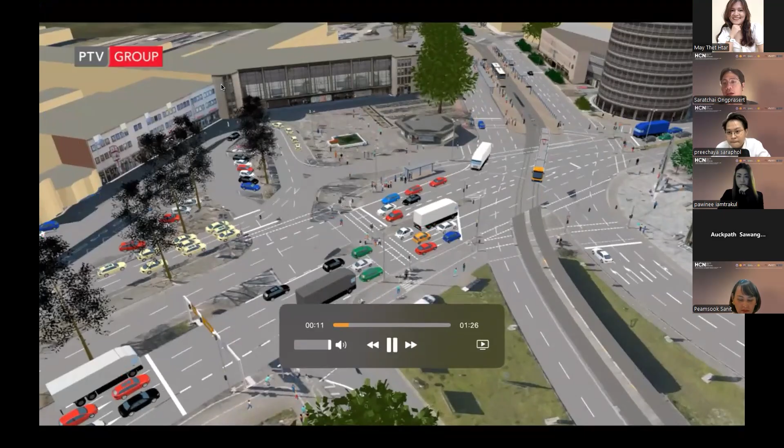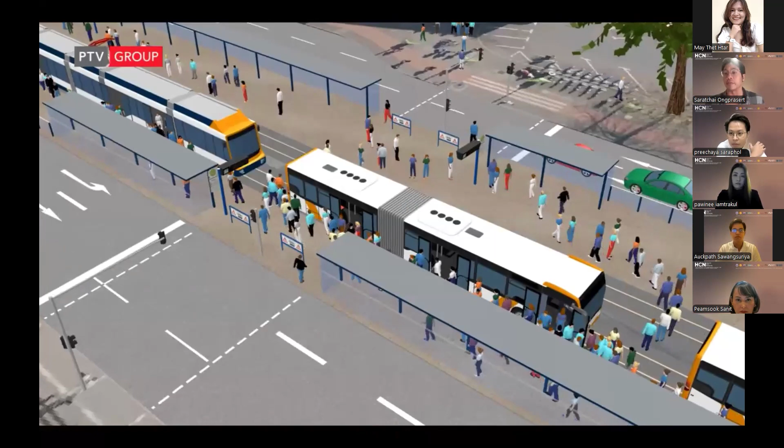I like to talk about simulation. I think everyone has very insightful views about the safety of vulnerable people like pedestrians, including bicycles and bikes. Sometimes, if something has not happened yet, you need tools for simulation and visualization to foresee what could happen if you implement something. Today I will show a number of examples.

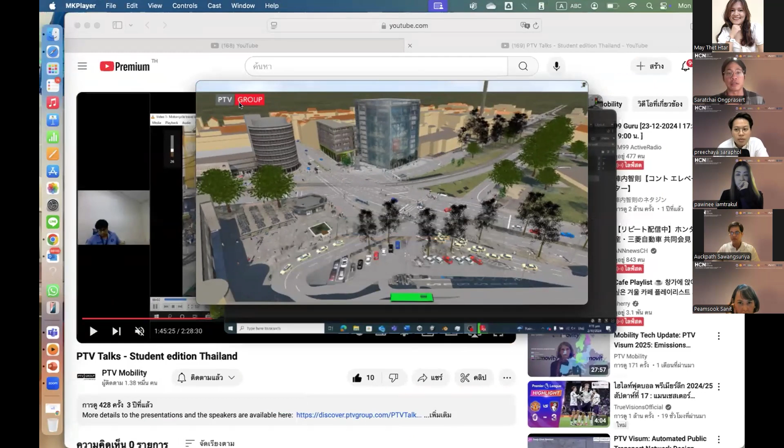This one in Germany is a very big, complex intersection, and it's multimodal. It could include trams, underground subway, cars, parking space, bus, and pedestrians. I think there's some bicycle and motorbike as well. So there's a lot of trajectories, a lot of traffic congestion and some crossing. With traffic simulation, you could see the picture clearly of what will happen after you implement something.

And this one is an intersection in Vietnam, Ho Chi Minh. You could see that it's quite complex. There's a bridge crossover, and under the bridge there's a lot of lanes, maybe 8 lanes per road. Inside each direction, there's a lot of motorbikes. As you know, there's a lot of bikes used in Hanoi and Ho Chi Minh in Vietnam.

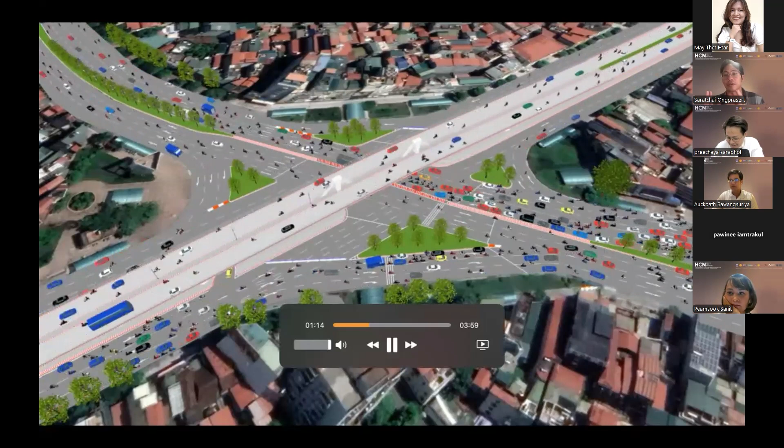In this case, we need to see the conflict at the intersection, the merging and the diverting. You can see that there's a lot of conflicts between the cars and the motorbikes. So this is one example where the simulation could visualize some trends about the safety, but it's not everything yet. Later, I will explain a bit more.

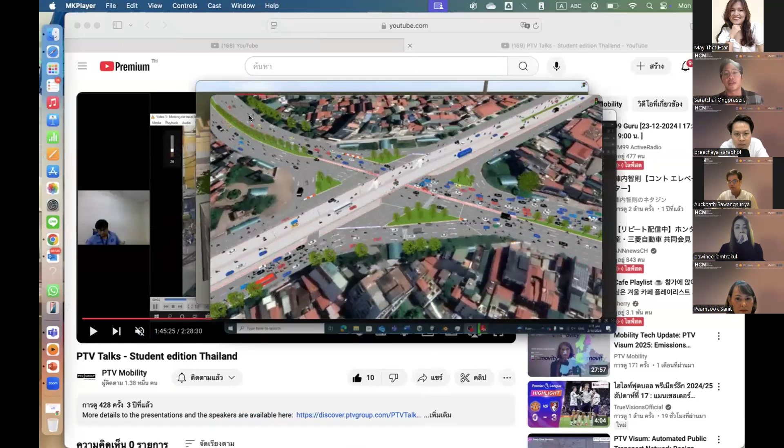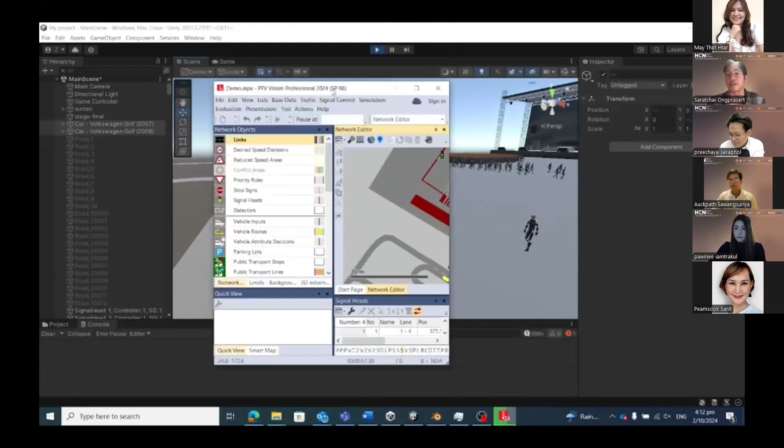Next case: this is not really the road, but an example that if you have an event, you would have some car access, and you will see the interaction between the cars and the people, checking the safety inside the event, whether the car is going to hit some people or not, something like this. Simulations would be useful to review the safety of the road.

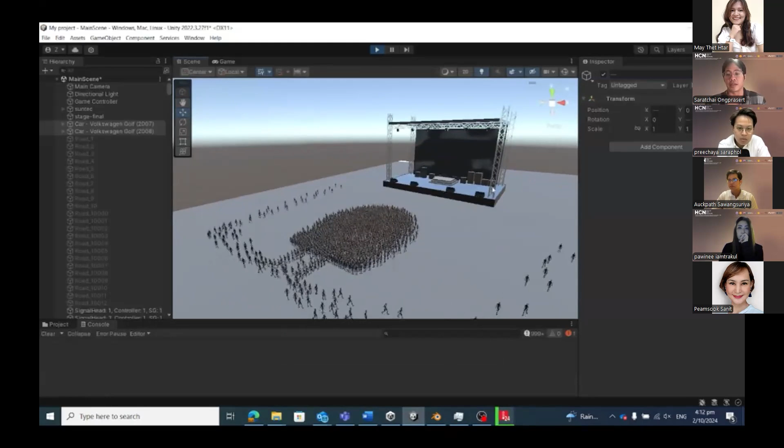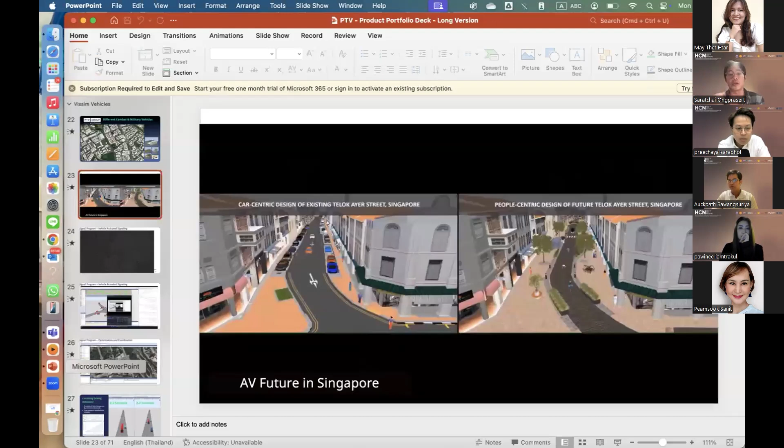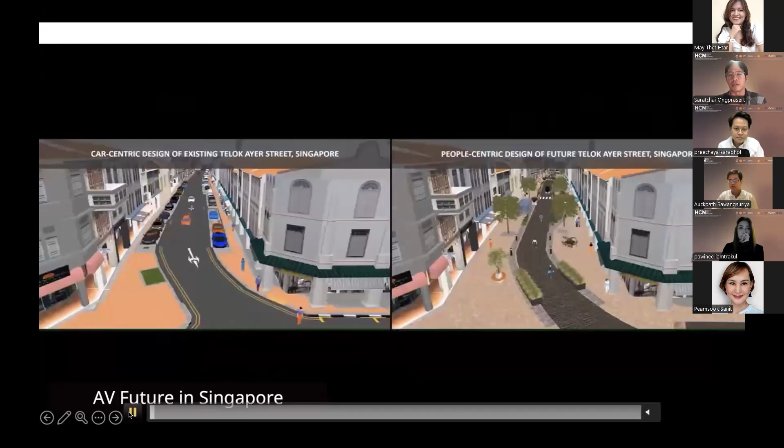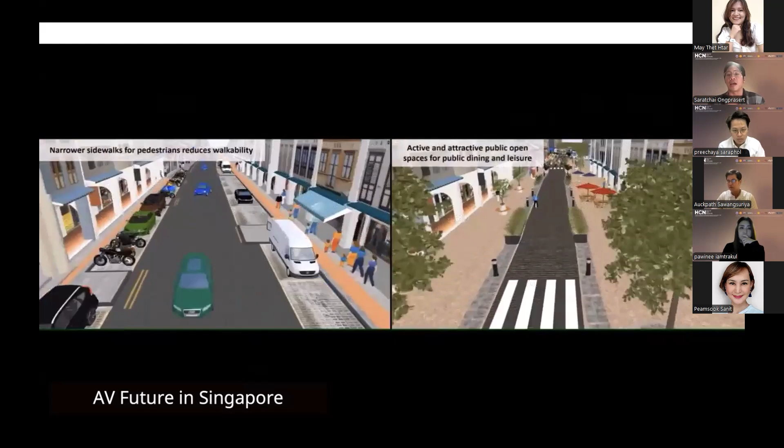Let's see some more. This is a case in Singapore. There is a plan to implement AV, autonomous vehicle, that has not happened yet in Singapore, and in Thailand we call it 'ถนนคนเดิน', the road for people. On the left hand side is the existing situation, and the right hand side is when they plan to implement the AV, and they would like to see what will happen, whether it's safe, whether it's congested or not.

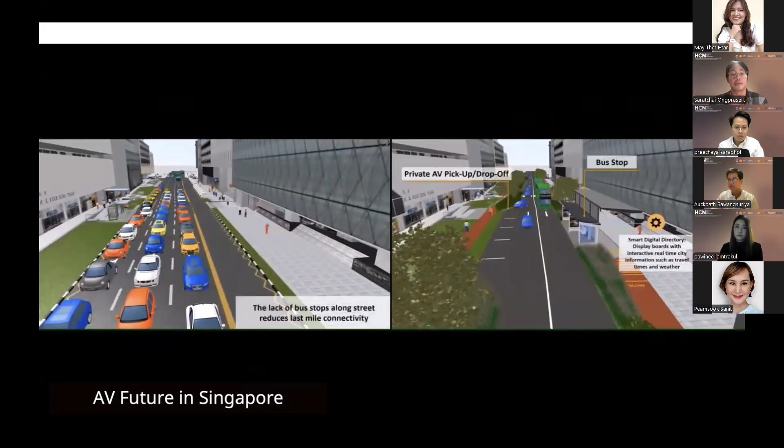You see, on the right hand side, people can ride a bicycle with a straight line, a safer road, safer bike lane, quite exclusive for the bike people.

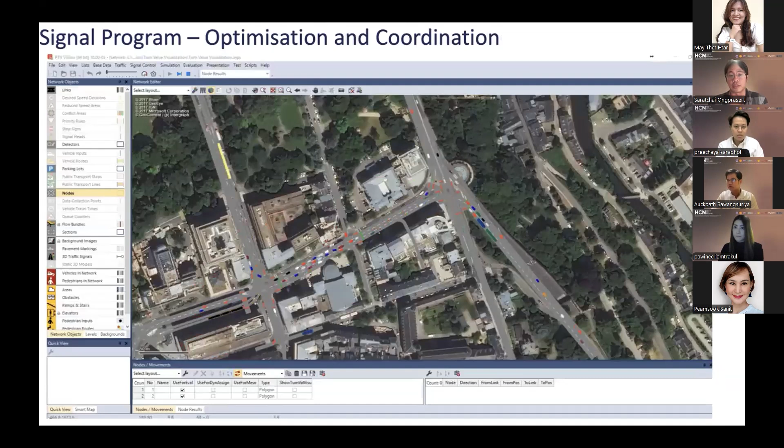Next, I'd like to show more details about how the simulation could handle pedestrians. This simulation is very flexible, based on the theory of social force: if you walk with some people, you're going to have some force, you cannot just hold their hands and walk together. There's going to be some force, a social force, and that's how we do the simulation. This mechanism makes our simulation result quite realistic, same as the real world.

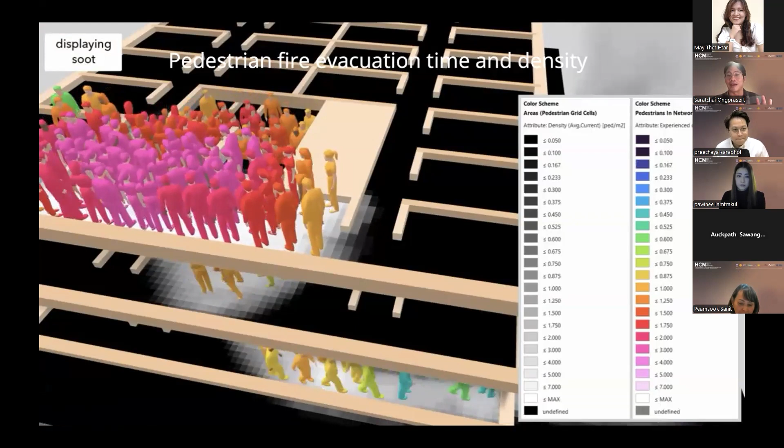So I'd like to show we could apply this kind of social force with evacuation. This is not today's topic, but I like to show the details the simulation could do. If this kind of detail could apply to a pedestrian fire evacuation simulation, you can apply this to the road as well.

Okay, this is another simulation. Let's say there's some flood in the subway, how can people evacuate from the subway? I will skip some part.

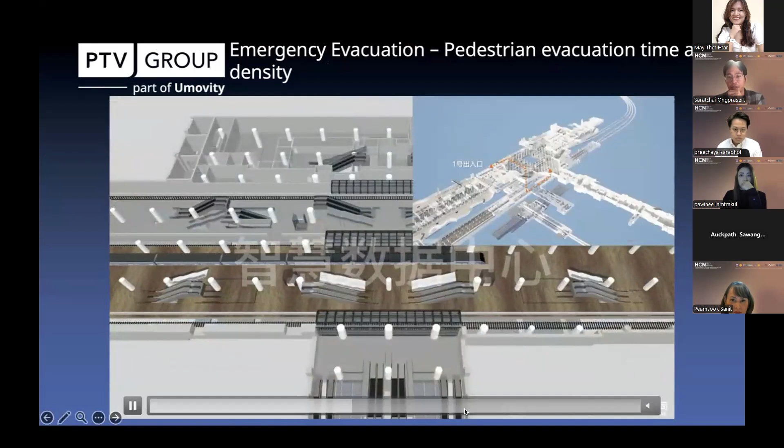Yeah, this one is very detailed, you could see the density of each area, how dense the people have to walk together, and how the speed would drop.

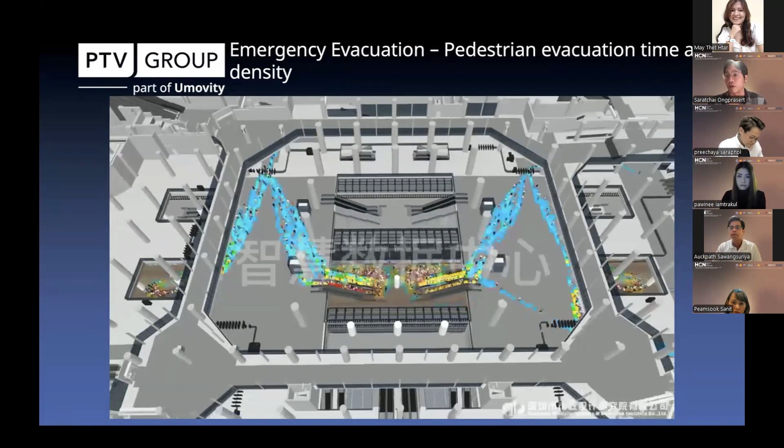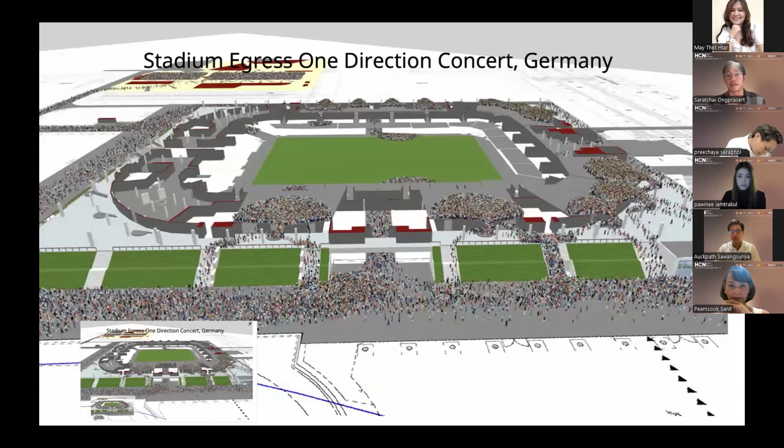This is some kind of egress simulation from a stadium. Like if we have a football match or a concert, we could see how the chaos would happen.

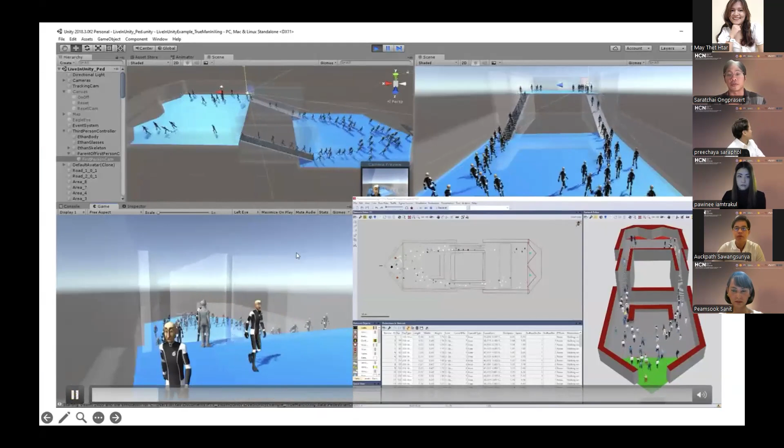Let's see another one. This one could show the detail of how people could walk inside the area.

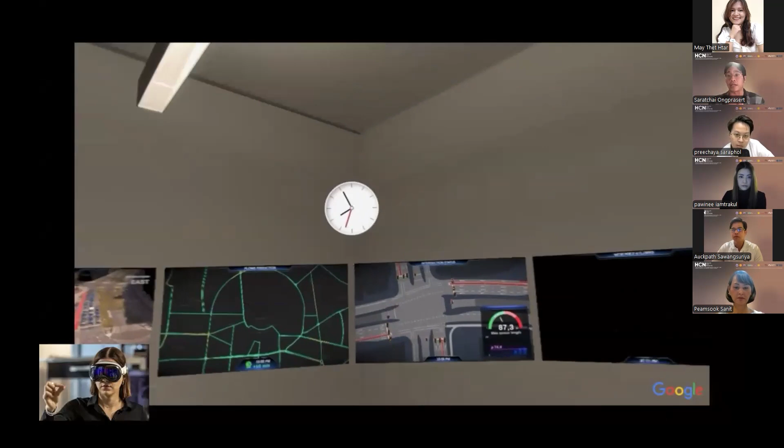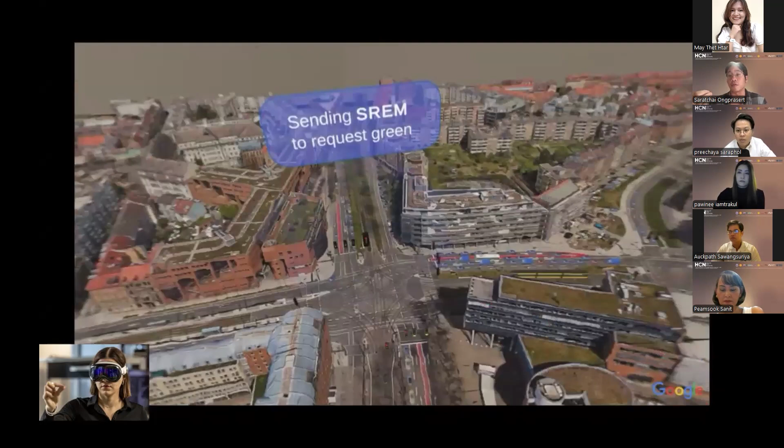Next is about the presentation. We could do the plug-in between our simulation with some visualization of VR, immersive, or digital twins, or metaverse, something like that. So we could see the real perception of the people walking, the people driving, something like that.

So we could really feel whether our road is very safe. We could see whether it's as we expect in the design or not, something like that. So we can check.

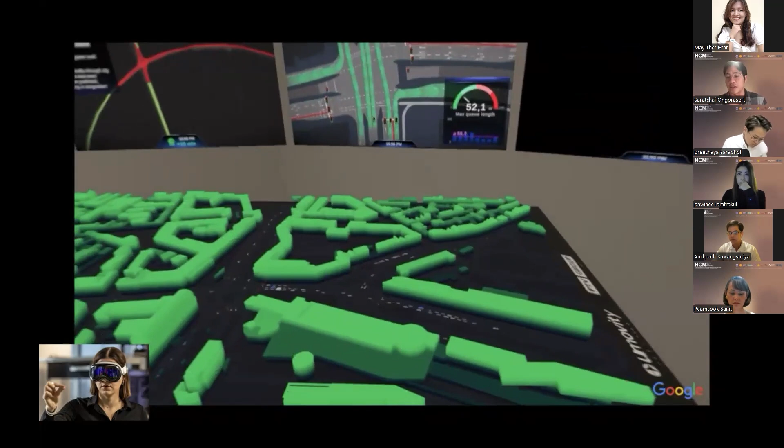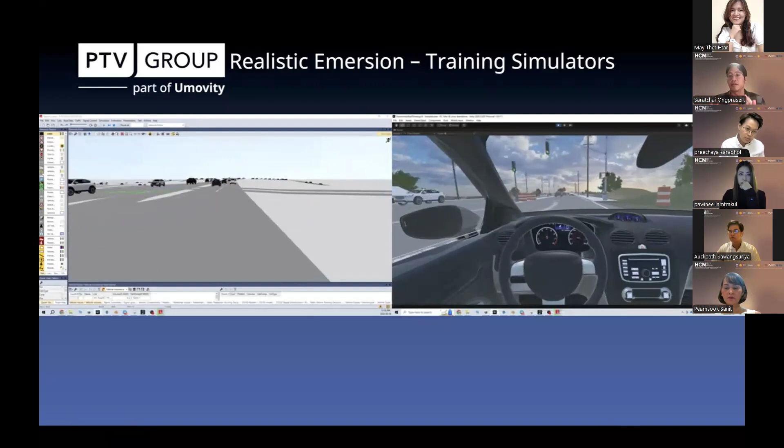This is an example of the driving simulation. On the left-hand side is something we're already familiar with, the traffic simulation. On the right-hand side is actually the same car on the same road, but presented from the eyesight of the driver. So we can really see whether the driver could see the pedestrians or not.

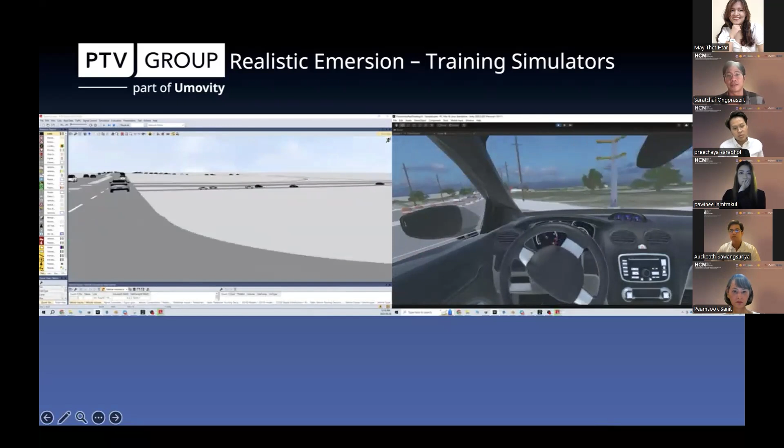This is another example to test safety, whether the bus driver could really see what is happening on the railroad.

In the near future, I believe this will happen. I'm not sure about Thailand, but before it happens, we need some simulation with autonomous vehicles. If 100% human driving, that's fine. 100% autonomous vehicle, that's fine. But if we mix autonomous vehicles, human driving, bicycles, and pedestrians, I don't know what will happen. So simulation should be very useful for this kind of thing.

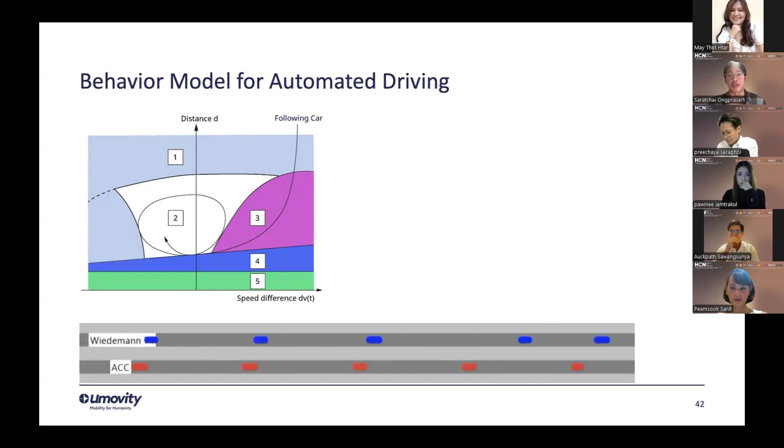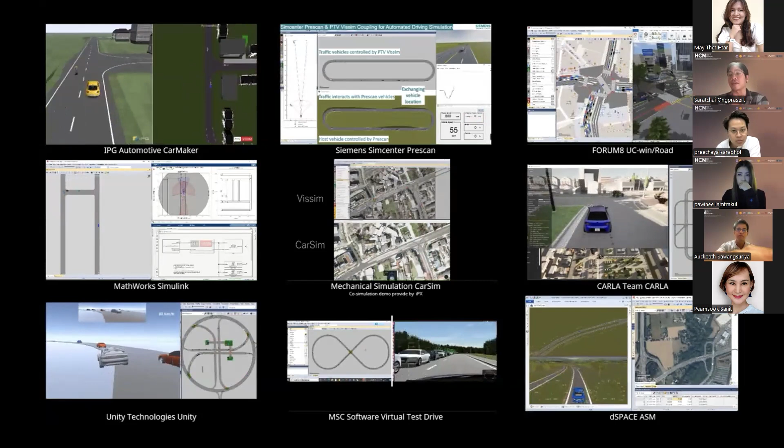This video shows the kind of data widely used in automotive companies, from America. There is a lot of simulation that checks the safety of this kind of new technology like autonomous vehicles in the near future.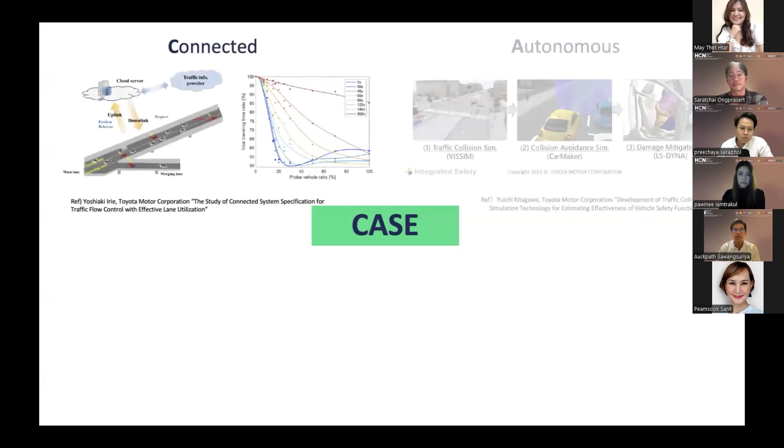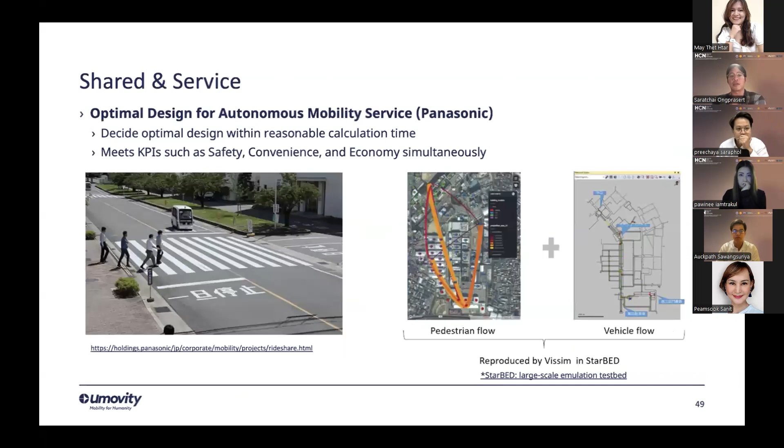I'm almost at the last one. You can see we can show a lot of views, like a bird's eye view on the right hand side, and normal view in the middle, or sometimes we could show the driver view to check everything, to assure that our road and our management is safe for everyone.

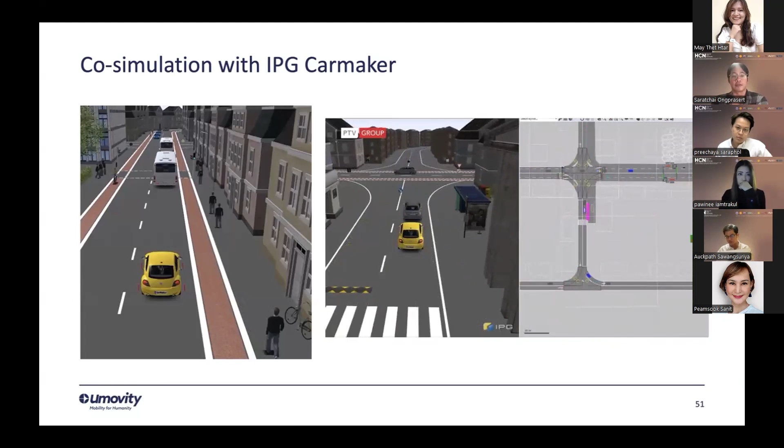Next, I'll skip to the last thing I'd like to talk about today, which is real safety, because whatever I've shown you today is just a concept, it's not the real safety. But let's see the real one.

This is from Ajahn Bo. I didn't do this, but Ajahn Bo showed us very good research about somewhere in Rangsit, Pathum Thani. As you can see, it is not very safe and it's not legal, so this research tries to make it safer.

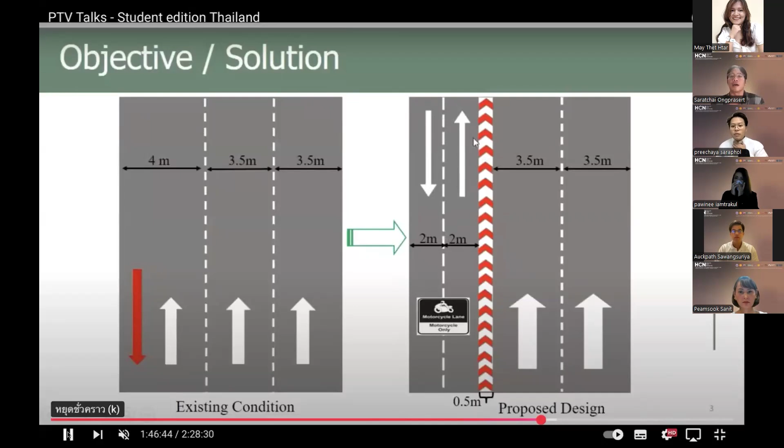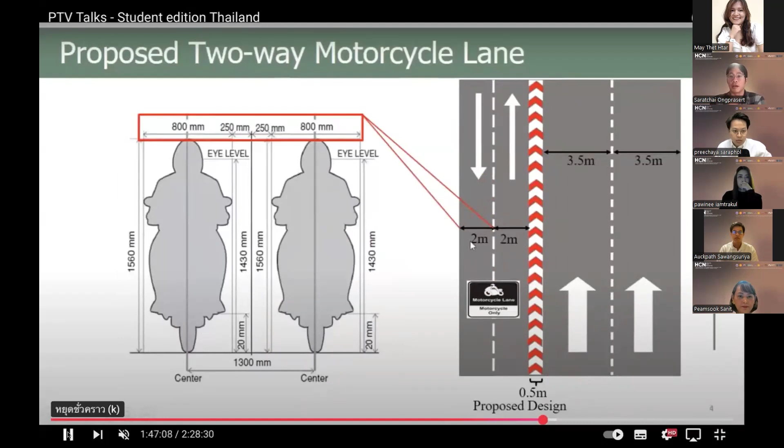We won't talk about the legal aspect today, just how to check whether it's safer or not. The researcher used a kind of trajectory analysis, checking how many crossings, how about the speed, whether this kind of trajectory has been checked.

You can see the left one is the existing condition, and the right one is the new proposal, with different colors for motorcycles only, or heavy trucks, or cars, that kind of mix.

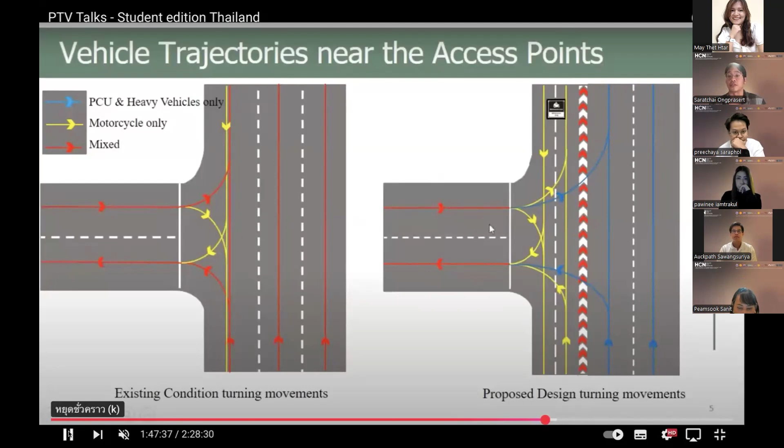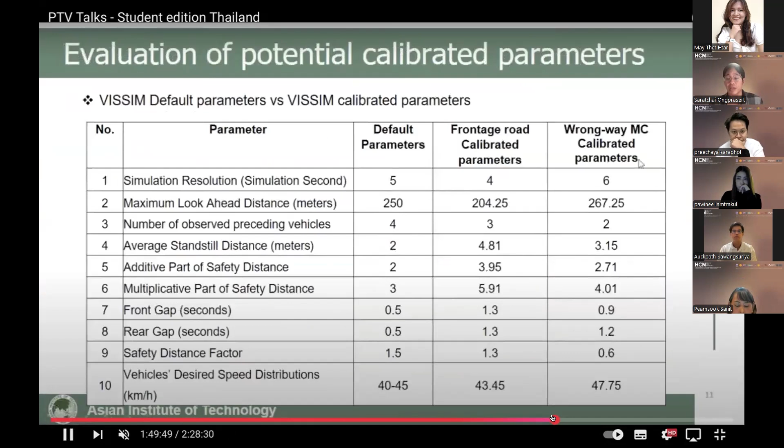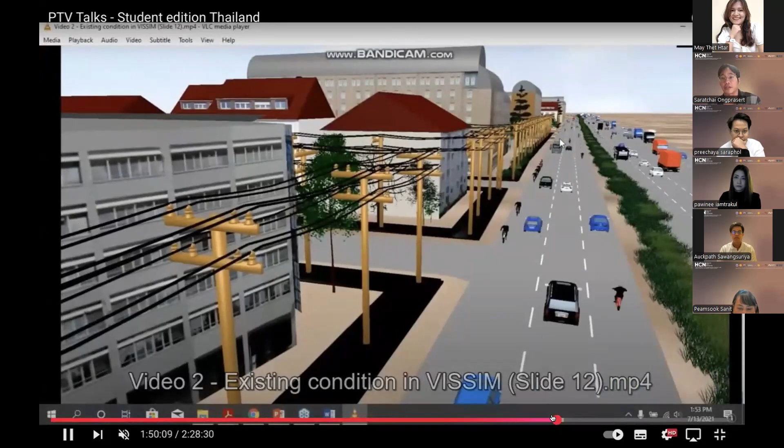This kind of trajectory could be analyzed with the traffic simulation software, and I think the result is quite useful. They can check parameters like headway, the gap between cars, so we could judge whether it's safer than before or not. Without the simulation, you can imagine it, but you can't really explain it to others.

And I think that's why simulation software is very, very useful for traffic safety. Okay, and I think that's all from me today. Thank you.